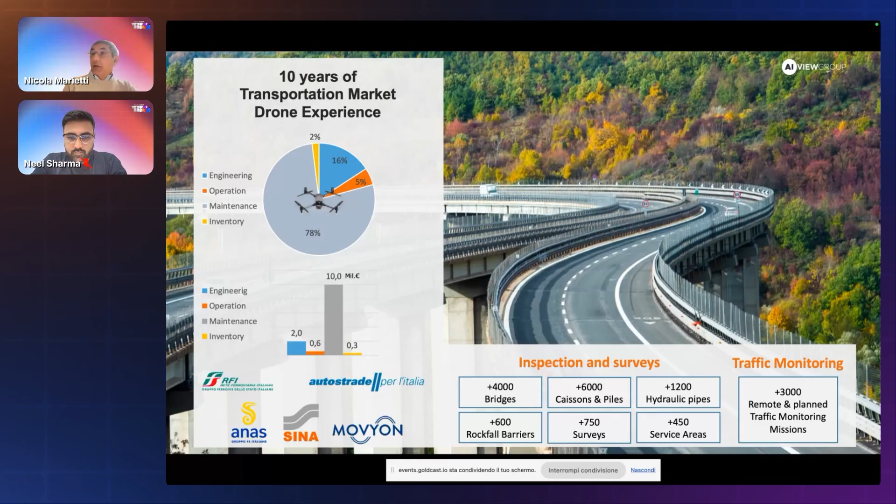From last year, we started a big project on traffic monitoring, and we performed more than 3,000 remote missions for traffic monitoring inspection with drones.

Our process and framework is quite simple. We perform operation in VLOS, BVLOS, and remote thanks to our control center. Then we apply intelligence on the data that we capture, and we certify the report that we provide to our customer. We work on traffic monitoring, that's the day-to-day argument, but also perform bridge inspection, road operation inspection, inventory, and surveys.

Today I want to present the latest addition to our company, our remote control center. The name is ReADI, meaning Remote Autonomous Drone Intelligence Command and Control Center. With this command and control center, we operate remote unmanned operations. We are integrated with U-Space services, with the UTM service provider in Italy, that is D-Flight. We also provide advisory and training for companies who want to start cooperating with our control center.

This is the workflow for our customers. We fly remote - we are remote pilots that fly for the customer, providing mission and service. Then we organize all the data for analyzing critical business information for the customer, and we let the customer act, concentrating on the main part of their business - so manage traffic, reduce incidents, or dispatch emergency services on the highway.

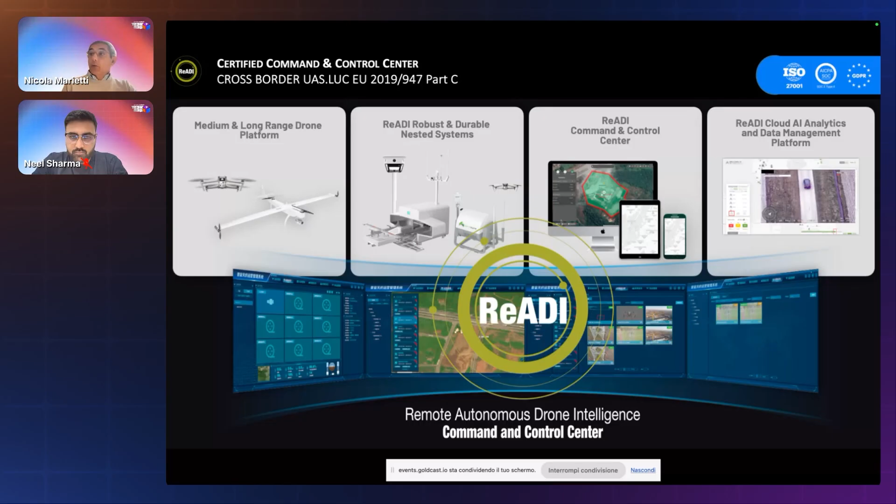With the command center software, we plan and work under our safety procedures in the operations and missions. And with the artificial intelligence module, we work on data, extracting business information for the customer.

Today we will talk about a specific use case, traffic monitoring - more than traffic monitoring, because at the end we started with traffic monitoring on the Italian highway, but today we do a lot of things with the same system. A system started for making only remote traffic monitoring. Today it performs inspection on the highway, emergency services, and control of roadworks.

The architecture is simple. We use a FlytBase platform for the command and control of the drone, plus our other platform for managing data through artificial intelligence and reporting.

Our objectives are related to traffic management, road operation support, emergency response, and also checking some weather events that could happen in a short time.

Today we are working with two main customers on the highway. The first is the biggest company in Italy, Autostrade per l'Italia, through their technology company named Movyon. We've been with them for 2 years, performing remote operations on the highway. We started with 5 nested drones installed at the toll gates of the highway, or in the service areas, so people getting gas can see a drone flying and monitoring the highway.

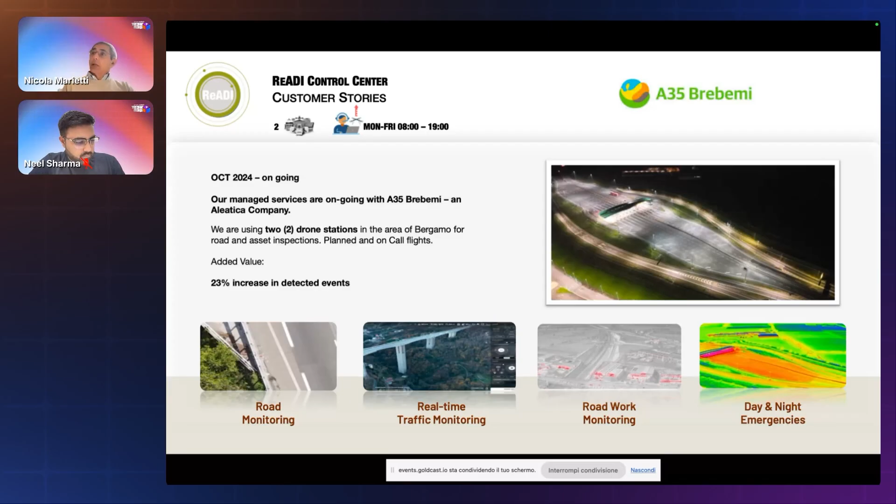The second customer started a few months ago - another company that manages part of the highway in Italy. Today we have 2 docks to nest installed, and we are moving forward with more of them to cover a larger part of the network. With both in this year, I think around 50 nested drone installations.

We start our system architecture by installing the specific hardware for the customer. Then we provide them all the analysis related to CONOPS, SORA, and so on, for letting them perform the operation. We choose the best drone and the best nest for them, relating to the needs of the customer.

Then with the flight management system, we provide all the mission planning and activities for starting the operation into our command and control center, ready. If we do not have the specific algorithms, we start to develop them, capturing data for training, and then we release the algorithm, the module, for the customer. At the end, we integrate the command and control center information into the traffic control room of the customer.

The customer has a traffic control room in which they provide information with fixed cameras. We add some video on their video wall with the information in real time of the drone's live streaming, plus all the information related to the availability of the drones and nests and what they are doing. So there's a real understanding of the general system, how it's working, which nests are working at this moment, or which nests are under maintenance, and so on.

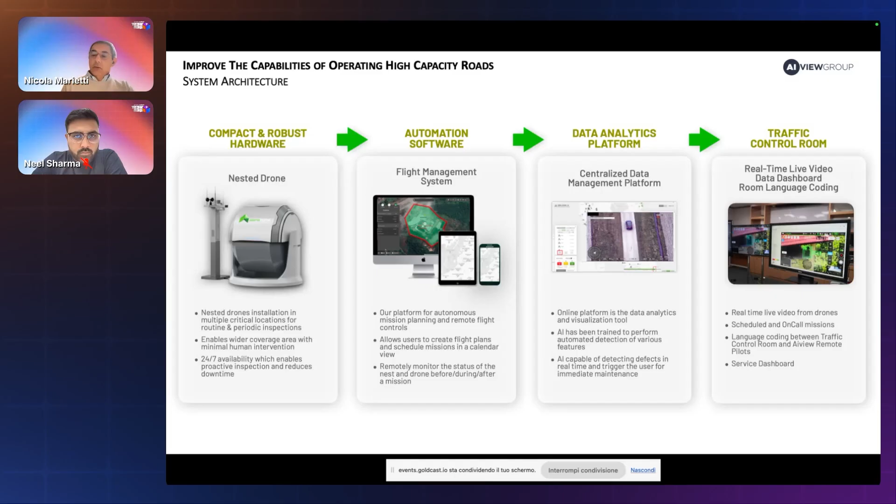Talking about artificial intelligence, we have some algorithms related to traffic monitoring, so we can analyze the traffic in terms of statistics, which cars, how many trucks, and so on.

Then we started to develop a solution related to roadwork and the signals into the roadwork, just to understand if the signal, if everything, is like they programmed it before starting the roadwork. So if everything is okay, we calculate the trajectory of the cars to see if there are no problems, if everything is safe. At the same time, the drone analyzes pavement crack detection, just to check if we need some kind of refinement and so on.

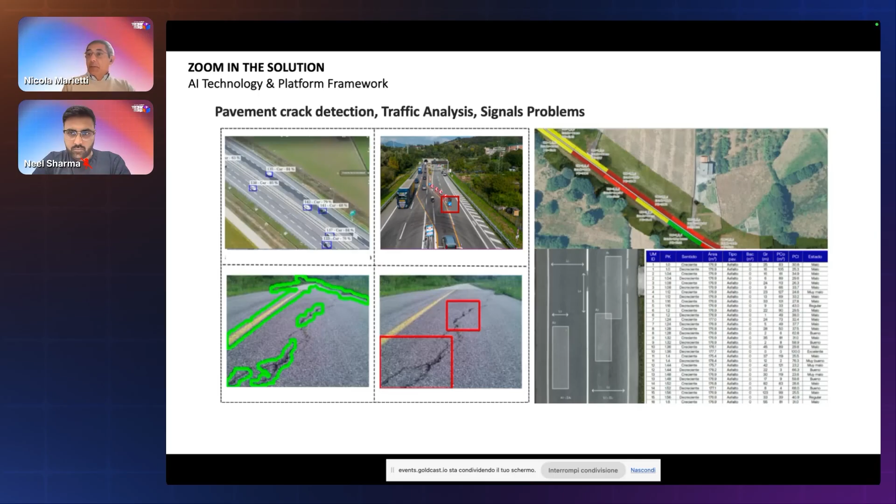We work on the on-demand mission, or on-call, as we say, or planned. This means that we are 24 hours in contact with the traffic control room of the customer. We have a radio connection with them, so we have a specific language to talk with them. We start our operation when we hear that something is starting to happen. We know where it's happening, and we send the drone there just to have a look in a few minutes and take the decision on how to proceed with their business process.

So in an on-demand mission, it's happened that cars are no longer passing because there is an accident in an area not covered with a fixed camera. So the drone is useful because it can understand and have a picture of what's happening.

Those are some of the cases that normally we have in our area, especially in the north area, in which we have, at this moment, in place, a lot of roadworks.

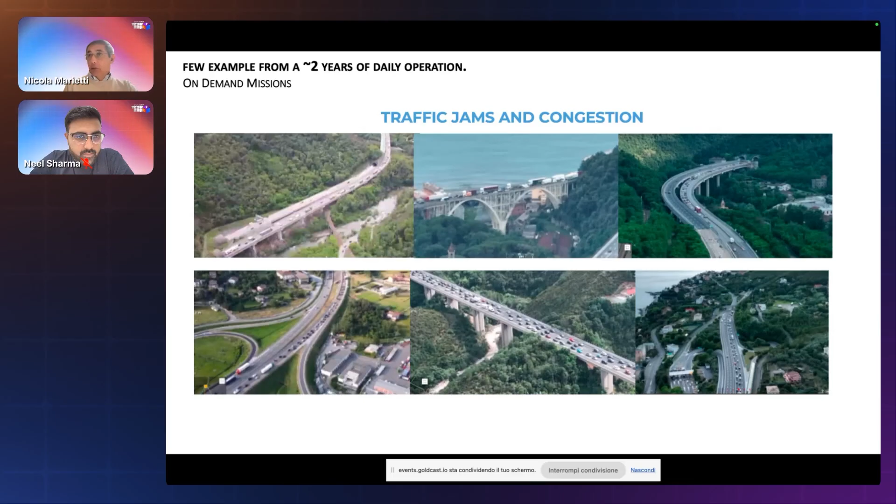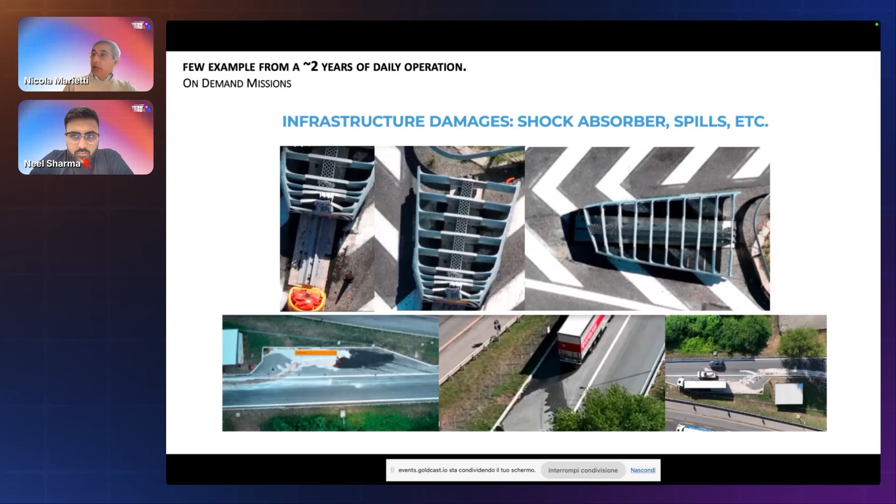Same for other kinds of issues that can happen on the highway. We supported them in different moments in which there were emergency actions. With the drone, they have 30 minutes of fixed camera time in the air, just to follow what is happening, how the emergency cars are moving, how the ambulances or doctors, everyone, is moving to solve the problem. That's another big result for the highway, because they reduce the response time and reduce the time in which the highway is not performing.

That's the video we did with them on the service that we provide.

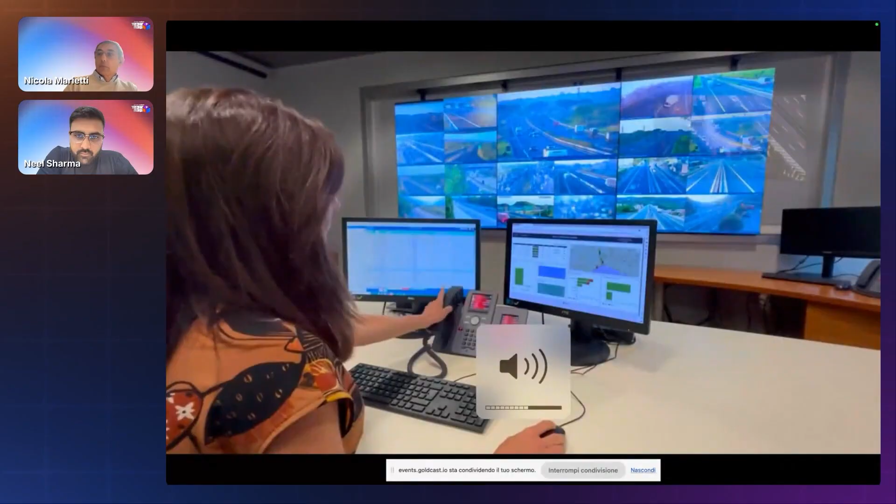This looks so exciting, Nicola. I mean, seeing it all in production from actual customer deployments, I'm sure the audience has a lot to learn from all of your best practices.

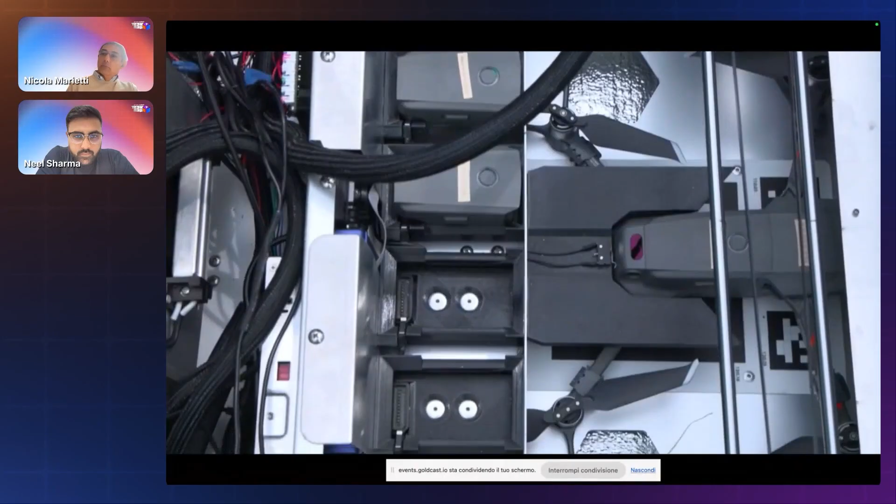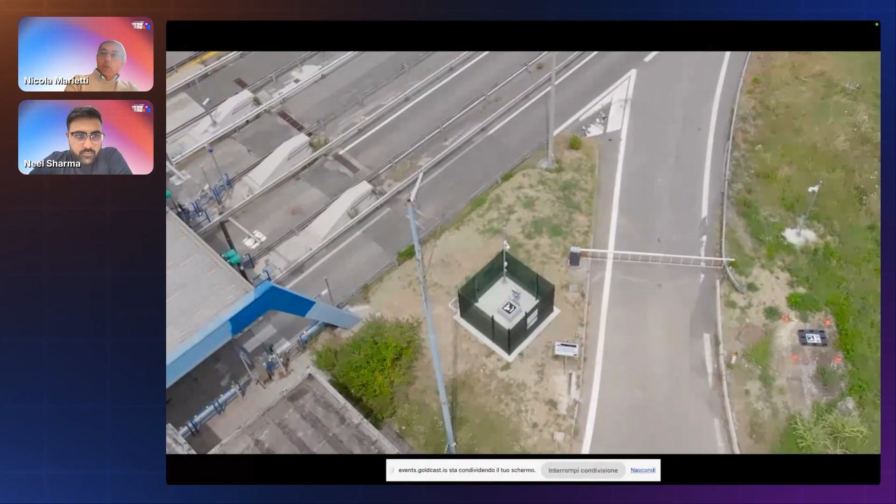As you have seen in the video, there is a nest secured with fences, with a secure camera, and so on. We have integrated all the workflow process into the customer system. This is the main part of the project, because the drone has become part of the process, not something different that can be called for a service one time, two time. No, it's a tool present in the traffic control room of the customer. And the traffic control room people are really happy to have support of something in the air that can be launched when they need it, or perform planned flights during the day just to check that everything is okay. This is the real and most important part of the project.

Of course, not giving them a simple drone, but as I said at the beginning, our goal is to let them introduce an unmanned technology in their operation. This is what we did with this customer especially, and of course other customers. This is the most important part.